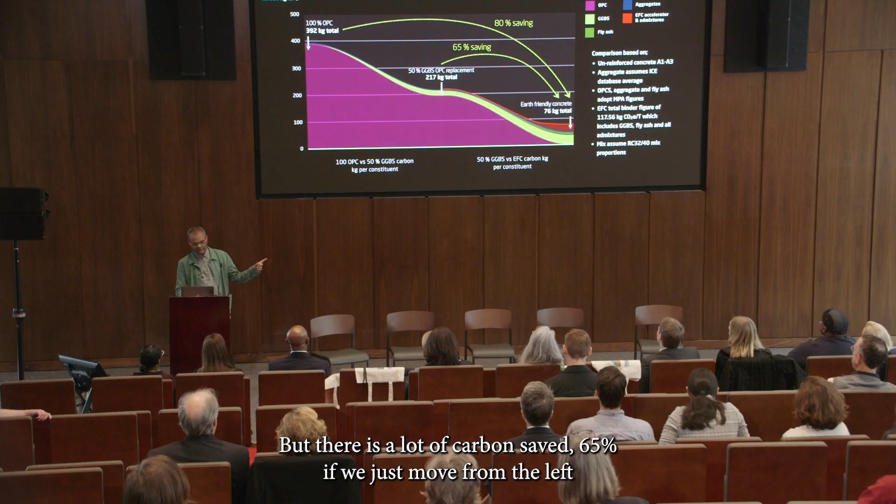I'm not going to go through too much data because it'll probably get a little scary, but there is a lot of carbon saved, 65%, if we just move from the left to the right in concrete. So we could begin to amend or heal the problem concrete has created.

When it comes to steel, how steel is made is the key. At the moment, the reason it's not a good material is because we use coal to make steel. You will probably know, and if you don't, you should, that Sweden has just started making the first green steel.

So if you use electric arc or direct reduction iron, there are ways of taking that steel, which is quite abundant, by the way, still in the core of the earth, and making it carbon neutral, at least, if not heading towards carbon savings.

In terms of demonizing these materials, I cannot accept that I'll suddenly have to stop my career, because stopping building means stopping engineering. I thought I'd show you a couple of examples of how you do things a little bit better. I can't imagine a future without towers, but that's one of the things London is stopping at the moment, and many of us are fighting it.

When you go to other parts of the world, that's all people are building, because we're moving to cities. I don't know how it's going in the US, but I can tell you in China, even Africa, and much of East Asia, towers are very, very important, and they're not going away.

So I picked a type to talk about, how to do it better, and what tools we're using to do it.

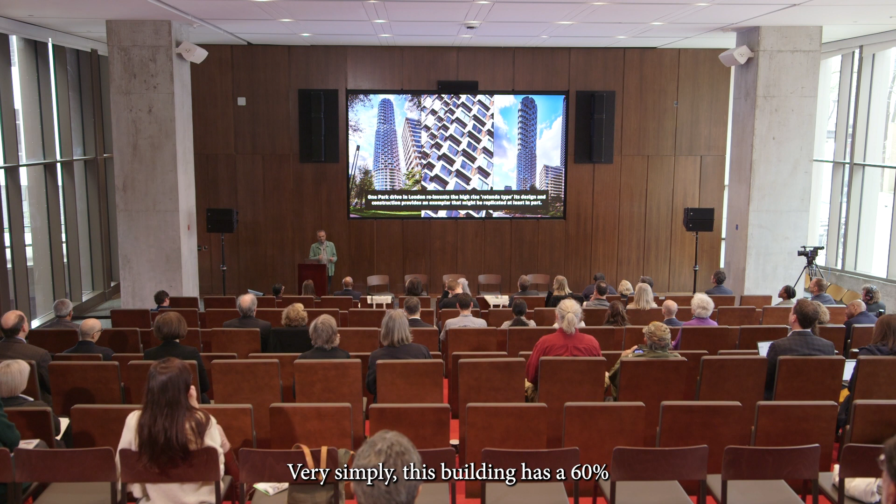So why am I talking about it like that? Very simply, this building has 60% more facade than any tall building you will normally see. Usually, that's the point at which tall buildings get killed, because of the facade-to-floor ratio.

When you do something as clever as this, like the architect has, most of the values we measure—the metrics we've used in the last 100 years—are beginning to shift. So clients are paying for something like this, highly expensive, but it will make the money back. More than anything, it reinvents a high-rise rotunda type.

Its design and construction provide, in my opinion, an exemplar that might be replicated in the global south. I know, as I speak, that there will be at least 50 of these copied in the near future. So it's a slightly better way of doing things.

You don't have to like towers, but it's very pertinent for me to go straight across to another one, which is the exact opposite of this, in Iraq—because that's where the difference between the two front lines is for me. Why would you put a tower in this region where everything is low-level across the Tigris?

The reason is very simple: in some parts of the world, non-modernization is actually threatening ecology. So here, the idea was really for Zaha Hadid to be invited back to a country to try to heal and repair a society, which is going to take more than 100 years after the damage we've done to this part of the world. Why wouldn't they want a tower, and why wouldn't they want to make it interesting?

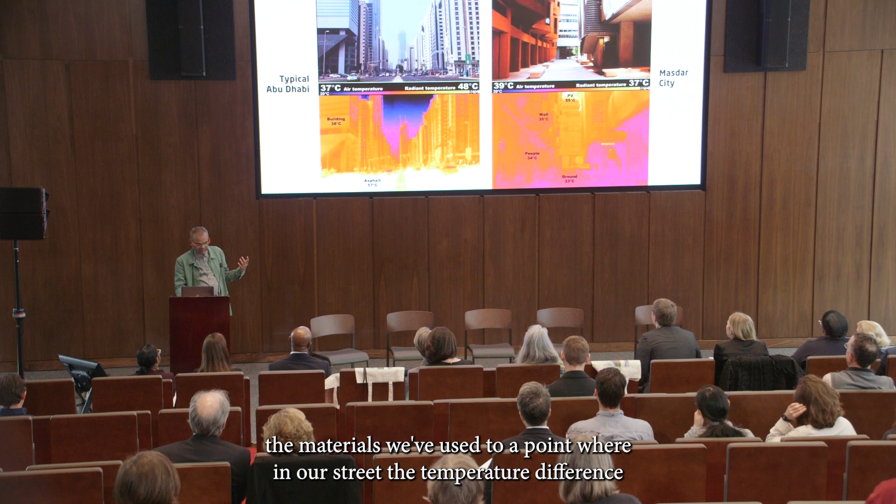But everything we learned from the old, using new tools, made us capable of designing this with passive systems, including the materials we've used, to a point where in our street, the temperature difference is about 4 to 5 degrees C compared to a site next door.

So just rethinking the urban form and making this passive ventilation, as well as making better streets, we brought the temperature down in the street by 4 degrees. When you think we're trying to work towards a 1.5 increase at the moment, that's a result as far as I'm concerned. So when you want to modernize, you can go back to some ideas and not be afraid.

And what this does, I think, is it helps us as engineers also have an ambition to change our own discipline. So most of the work you're now seeing, we are doing with our own tools in-house.

Very quickly - when young engineers are starting, they have to make some very quick decisions on how to do something that's low carbon. And the only way you can do it is not through code. You have to go back to the basics and try to understand how you can measure the potential embodied carbon and therefore the life cycle assessment.

So tools have an enormous capacity, provided they're driven not by a non-collaborator, but by a smart person, who can then collaborate in a slightly different way.

So the future of concrete - the recent material, if you haven't heard about it, is called Seratech, which was invented at Imperial College, and it replaces the limestone cement. We are just about to scale it up.

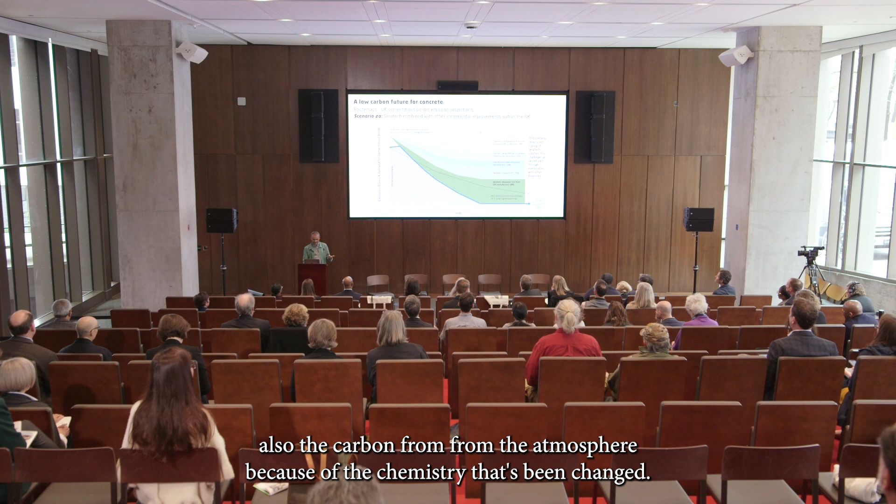Why do I mention concrete? Because I keep going back to what we're using throughout the world, but also some of the Pritzker Prize winning type of buildings. And when I look at them, most of them - this won a Stirling Prize for Grafton - I think that concrete is never going to go away. And this way of thinking should not be abandoned, the basic idea of how you make a building.

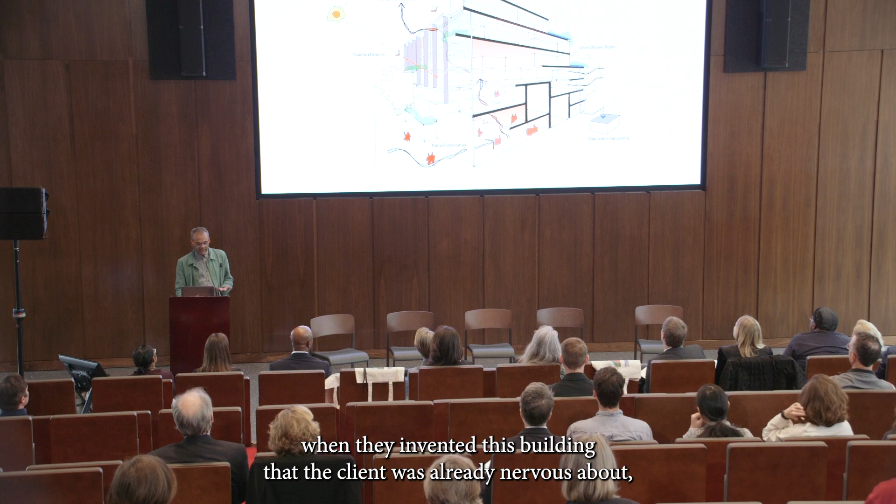When they invented this building, the client was already nervous about using concrete. It's at Kingston University. But what we were able to show them was combining these three boxes. It's a house for the city and the university. It's a fantastic building by Grafton.

We could peel it all the way back to the most basic, simple, optimized systems in structure, so we could use as little concrete as possible, but also the most efficient concrete, and increase the lifespan of the building from normally 60 years to beyond that.

So sometimes simplicity is the power of actually understanding this. And you're not going to give that to somebody who can't do complex buildings. Somebody who does complex buildings can do the simple ones better than somebody who does simple buildings all day long. It's just the way it is, as I see it.

So what has that done when we published that? The other missing point - I said to somebody earlier, I don't see any developers or constructors in here. I think that's a major problem for you and for us, for everyone. So construction people need to be brought on board. That contractor was so pleased with winning the awards.

We are together now with Cambridge University and many others, developing a steel and concrete low carbon cassette system, just going through. So the research is being funded by a construction company who won't patent it. It's just that their ESG also has to respond to the climate problem if their shareholders are going to be happy. I haven't stopped at that.

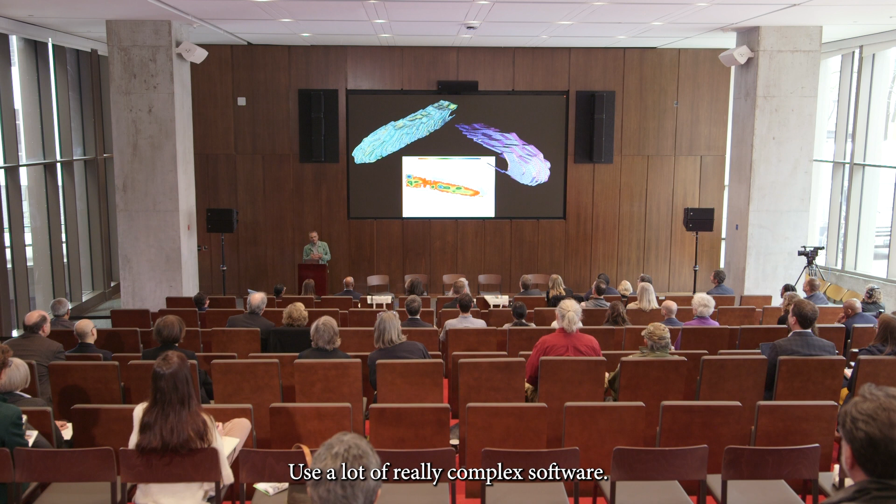And it was a very simple idea, metaphorically. Driftwood was what he found on the site, and how could we recreate that in steel? We took a lot of time to take the shape, not really interrogate it, but take it. How could we just make that shape? Used a lot of really complex software. These are images from Gehry's software, some of you will know.

We spent so much time really trying to rationalize this thing and find simple, cheap ways of doing it, and eventually came out with a fantastic paper project, only to discover that we had a blind spot, because the only way you could make that steel was through that machine on the top left, which is about 180 years old.

So to bend this steel, it's still going there the old-fashioned way. It's not 3D printed, it's not all these things we read about, how we can make almost anything and mass customize. The old-fashioned crafts are still working like that, and they could only bend a 6mm plate. So all the optimization I showed you on the tools and in the computer was largely wasted, because if we'd started from there, we would have designed it very differently. So blind spots are important.

Blind spots can also be dangerous for somebody like us coming to the US to say things and upset people. So when we do competitions, we find ourselves in this situation.

Broad Art Museum in Michigan, which is now old, which Zaha did - we won the competition by not doing a curved building, because the general feeling our side of the Atlantic was that you don't like curves. So we thought we'd keep it straight, and we'd go to Detroit and look at the car industry and take metal from there and fold it. So we also thought we were being very smart materially. This metal could do the structure, the environment, the light, and everything else.

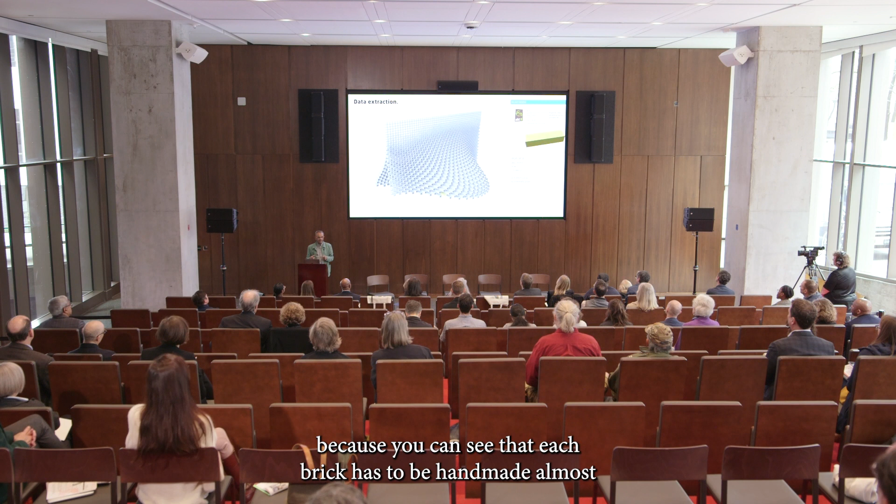You need the construction people with you when you do something like this, because each brick has to be handmade almost, since they're changing in size, thickness, and where they are in the wall.

I wanted to show you that a bit more, because the other strategy is that most of these people don't like you to publicize it. So we did a drone video for ourselves, and on the day it was released, because the client often wants to take all the credit for these things, we took a video without telling them and made sure the world knew who the engineer and architects were. So there are other strategies that happen.

This is a project with Thomas. We entered the competition together in Houston. I wanted to put it in for tooling purposes to show what we've been doing with it. Farshid Moussavi is the architect with DLR. The three of us entered the competition together and beat some really good competitors.

It's the Ismaili Center, a cultural center in Houston, with a prayer space underground, but also civic space up in the air, gardens, and beautiful landscape, 11 acres, with a small building inside it. I wanted to show it to you because I think, in a way, I'm hoping it will bring the East to the US.

It's an Islamic idea in theory, from Aga Khan, an Islamic community idea that isn't just stealing something and applying it as a collage. It's been thought through—the landscape, the water features, and all the other studies and research he's done for the last 20 years or so. And she's from Iran, so there's a bit of Iranian Americanism in her, so you can see the combination of different people from different parts of the world coming into a wonderful city like Houston, which is ready, by the way, unlike Michigan.

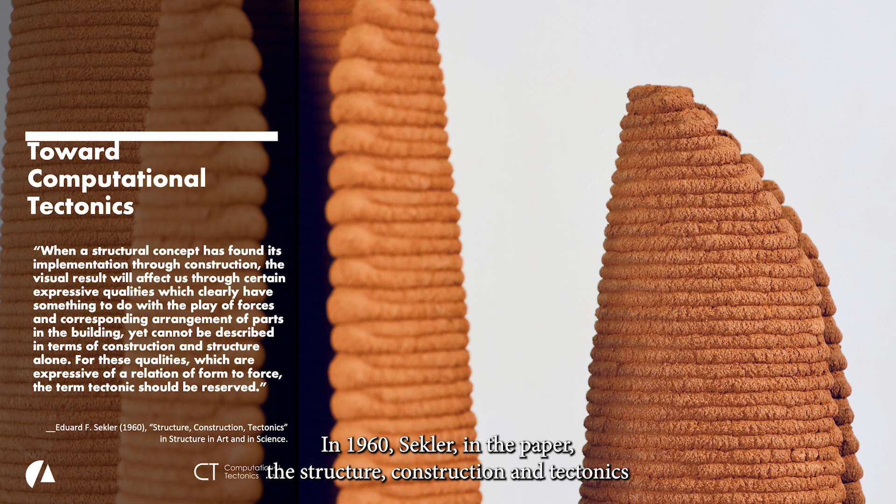In 1960, Sekler, in the paper Structure, Construction, Tectonics, highlighted the expressive qualities of the corresponding relationship between forces and building parts that can only be described through the term tectonics. Tectonics is derived from the Greek term tekton, meaning builder and carpenter.

To build or construct, we need to understand the agencies involved in the design process. One of the main agencies is material systems and their role as active drivers in the design process. The other is fabrication techniques, such as industrial robotic arms, to consider fabrication possibilities and limitations in design processes through a computational design framework. This computational design approach can integrate these agencies in an expressive form to embrace the tectonics of form and structure. Computational tectonics is a computational design approach using advanced algorithms to link materialization processes with form and structural expressions.

I'm happy that Hani covered all the material issues, so I'll make it very simple here. The relationship between material and construction with environment can be considered one of the main factors in changing the climate by emitting carbon. Research shows that the emission of carbon dioxide in the built environment is more than 50%. Carbon emission is 28% for building operations and almost 23% from production of building materials, such as concrete and steel. One approach to address these challenges is applying methods like cradle-to-cradle or a circular economy in building construction.

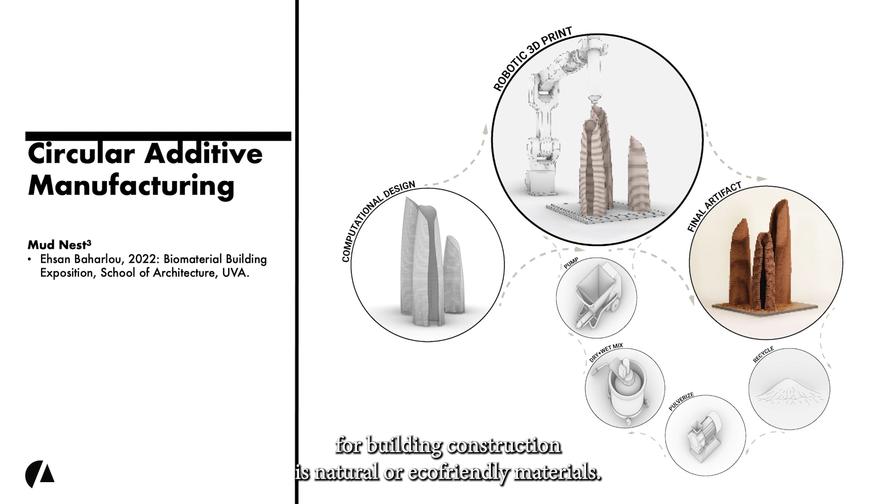A type of material that has enormous potential for building construction is natural or eco-friendly materials. According to the World Business Council for Sustainable Development, the use of bio-based or eco-friendly materials with carbon sequestration properties will reduce the carbon footprint of buildings. One of these natural materials that has been used in construction for thousands of years is soil.

Mud Nest 3 is an attempt to test the process of circularity to explore the tectonic potential of earthen materials in 3D printing non-standard forms that address challenges such as buckling behaviors. With a sustainable approach, we use Virginia red clay. We pulverize it and grind it. After a series of mechanical sedimentation tests, we prepare the dry mix, then make a wet mix, and after that we start using robotic fabrication to 3D print this small artifact.

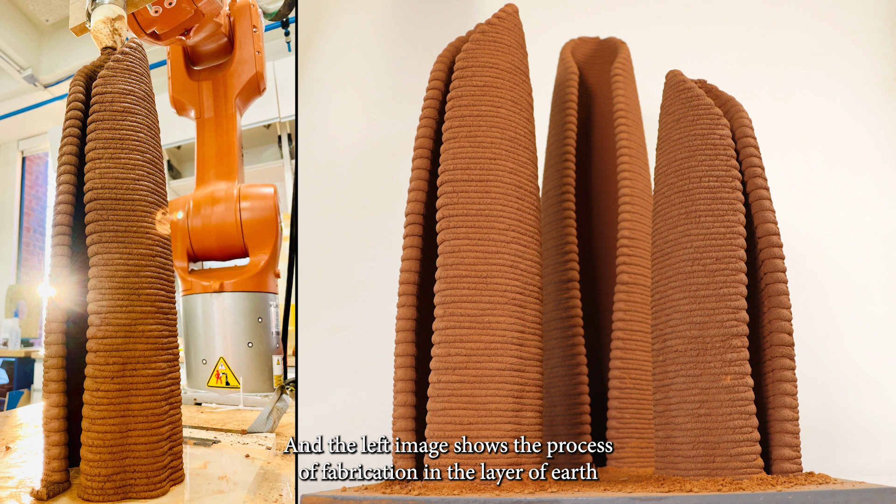We developed a computational framework to simulate the buckling behavior while generating a toolpath for 3D printing. The computational framework is a parametric tool that monitors the user's input to keep it inside the parametric space. In this image, the left picture shows the process of fabrication, where layers of earth material are deposited in a specified location, and the right picture shows all the artifacts standing next to each other.

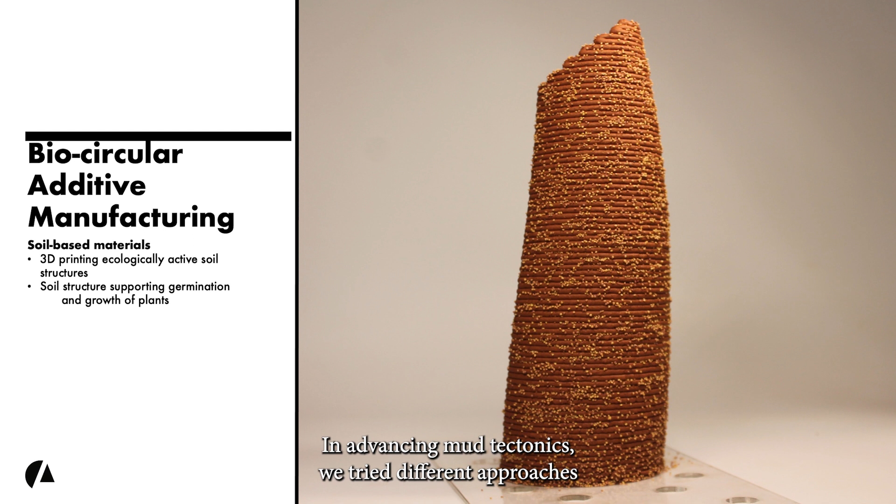As I mentioned, in advancing mud tectonics, we tried different approaches to keep the earth structures ecologically active. We developed a mixture of mud without any chemicals or additives. This mixture is viscous enough to be 3D printed and has enough nutrition to support seed germination.

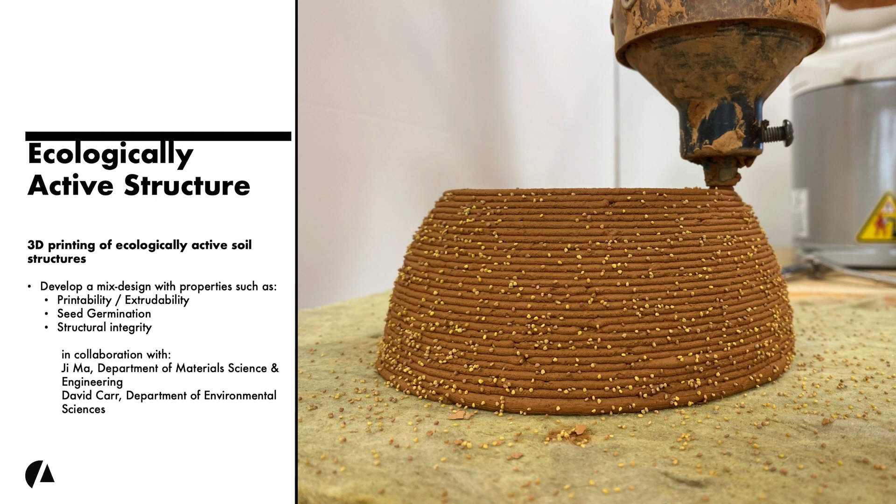Prior to the mud project, in collaboration with Professor Ji Ma, Department of Materials Science and Engineering, and Professor David Carr, Department of Environmental Sciences, we developed this ecologically active structure. In this project, we started to study the feasibility of seed germination while measuring the water content of the soil, and we tried to move toward more architectural elements, such as dome-like objects.

Here you can see the process of 3D printing with a robot and with a simple extruder bot that extrudes mud on location while we are sprinkling seeds on it. We kept seeds to grow fully and start seedling to cover the dome structure without damaging it.

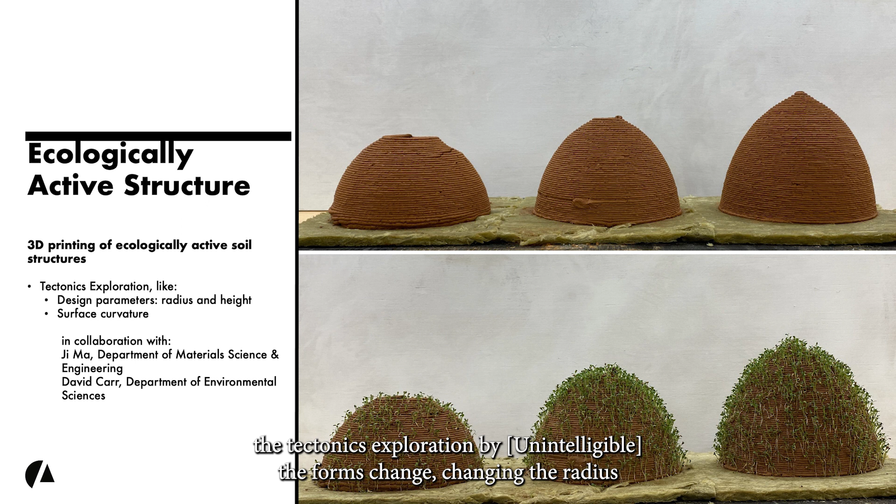We continued the tectonic exploration by parameterizing the forms, changing the radius and the height of the prototypes. It shows at which level the overhanging can work and when the deformation will occur according to the form.

For example, in the images on top, you can see that it cannot cover the whole dome, and it just started buckling in the left image. We continue the tectonic exploration.

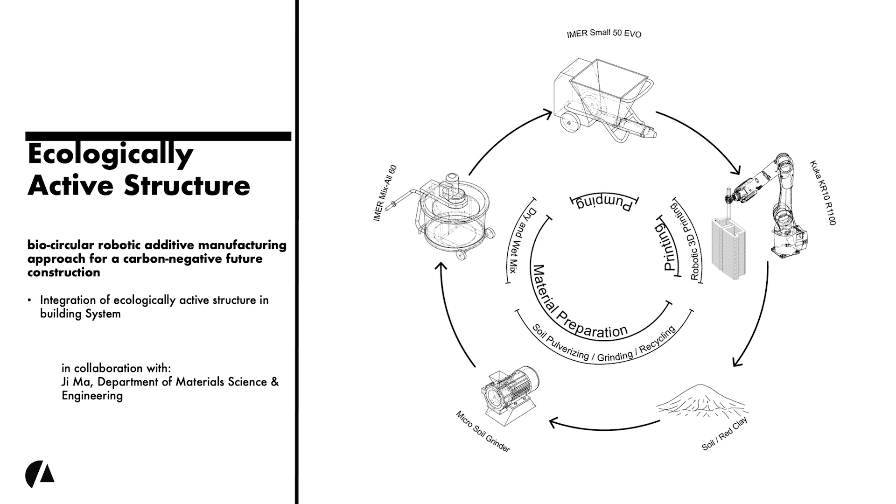An ecologically active structure, we call it, is a structure that maintains certain conditions for flora and fauna. We started to develop a mixture of mud without any additives to be printable and provide us with the possibility to scale up the process.

We adjusted the fabrication process from the small extruder to use a progressive pump. The process of fabrication was aligned with circular construction. We reduce, recycle, and reuse the soil until we achieve the desired tectonic system. This can be called a regenerative design process to rethink mud architecture and revolutionize it.

Here you can see we targeted a building element, part of a partition wall fitted between the stud structures. One side of it was designed to germinate, and another side was left to be considered for finishing layers. The space between these two surfaces is suitable for adding eco-friendly insulation, such as hempcrete. You can see here the back is not germinated but holds the structure, and in front it is completely germinated.

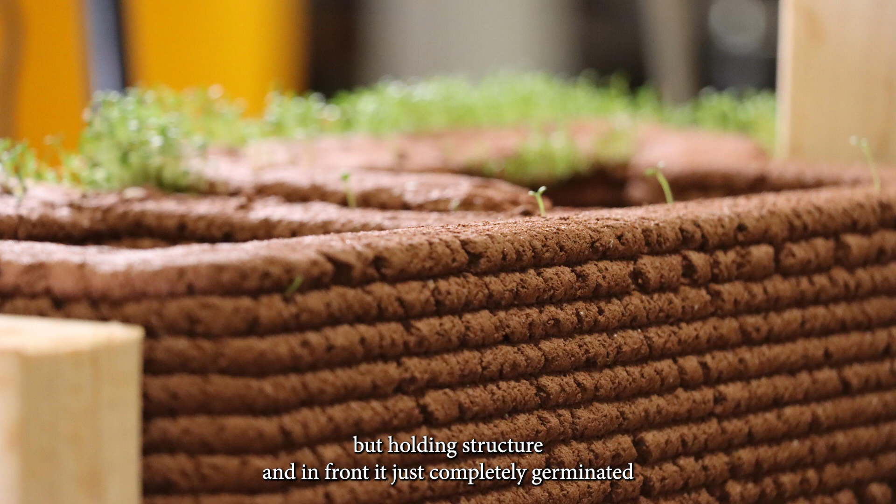Here you can see the final installation between the stud structure. It shows the time lapse of growing seeds until it completely covers the outer surfaces.

In conclusion, advancing mud tectonics manifested in this series of projects uses local resources and seed germination to not only be a suitable approach, but also sequestrate the emitted carbon to the environment. With an ecologically active strategy, we can move toward a carbon-negative future construction.

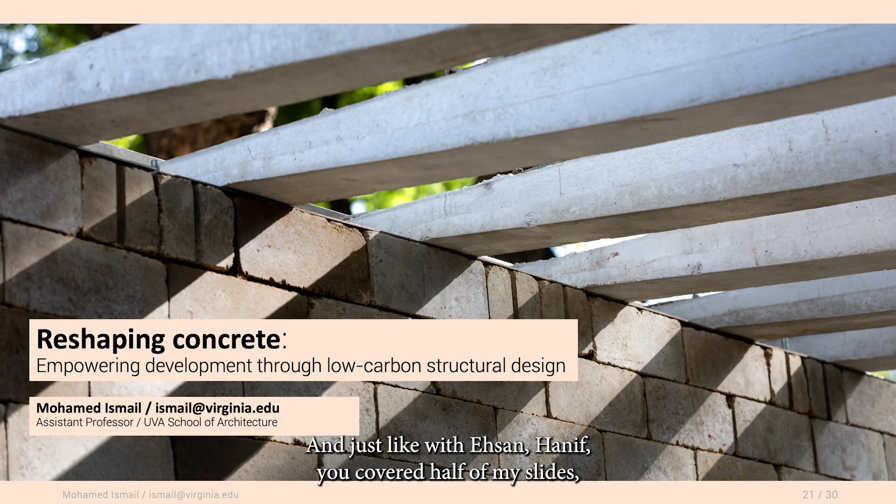And just like with Ehsan, Hanif, you covered half of my slides, so I'm going to just speed through a lot of what I have here. But I want to start with this visualization.

You've heard the statistics, we're building the equivalent of a new Paris every week. Urbanization is happening at unprecedented rates. This is a map of urban growth over the next 80 years, and what you'll see very quickly is that most of this urban growth is happening in developing countries, or less economically developed countries, the global south, whichever term you prefer. By 2050, 90% of urban growth is expected to happen just in Asia and Africa alone. What this means is that we need to build quite quickly.

I also want to note that this is both an academic and personal interest of mine. I grew up abroad, my family is from different parts of this, and so this is a reality that a lot of us see if you're from a similar background.

For me, what that's meant is seeing things like this. This is a common sight. This is a photo from Khartoum, Sudan, which is where my family is from. What you might see is a family that has most likely been allowed to squat in an unfinished construction site. It's a concrete frame building, most likely residential. The family building it probably didn't have enough money to actually finish it, and so they allowed this family to squat in exchange for them watching over the building materials.

And so it reflects this really interesting urgency and reality, which is hard to connect with what we see here, which is essentially that the equations for the cost of construction are not the same everywhere. As opposed to, say, a more economically developed country like the US, where labor really drives a lot of our choices, and so we can get away with less efficient structural systems. We don't care so much about how much material we're using. Less economically developed countries can have materials account for more than 80% of their construction costs.

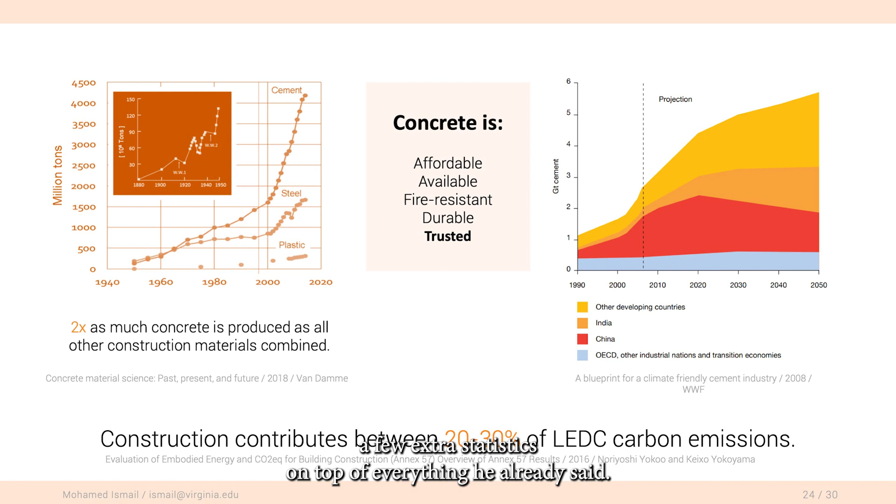Now, Hanif spoke a lot about concrete, so I'm just going to drop a few extra statistics on top of everything he already said. Since the Industrial Revolution, concrete has outpaced the use of every other material. In fact, by today, we're producing 2 times as much concrete as all of our other construction materials combined. It's second to water as our most common material.

Now, why is that the case? Part of the demonization of concrete is that it's just really good at what it does. We don't really have many materials that are as affordable, as available, fire-resistant, durable, but most importantly, in my opinion, is that it's trusted. We've used it for over 100 years, haven't changed it very much, and our building codes are quite hard to change, if anybody is aware of this.

And then when we look at where this concrete is being used, currently China is outpacing the rest of the world, but places like India and Africa, by 2050, are expected to explode in their use of concrete construction. And this is largely because of those urbanization statistics.

And what's interesting is if we look at our carbon emissions globally, we say about 11% is just due to construction. In developing countries, it's 2 or 3 times as much - the carbon emissions associated for that country is associated with construction. So it's even more important for them to start considering these systems.

Residential construction uses about half of our concrete around the world. It's more in LEDCs - basically every statistic I say is exaggerated when you look at a developing country. And most of these systems use what we call flat prismatic concrete construction. Everything is kind of rectangular. It's a system that is developed primarily to reduce the cost of labor.

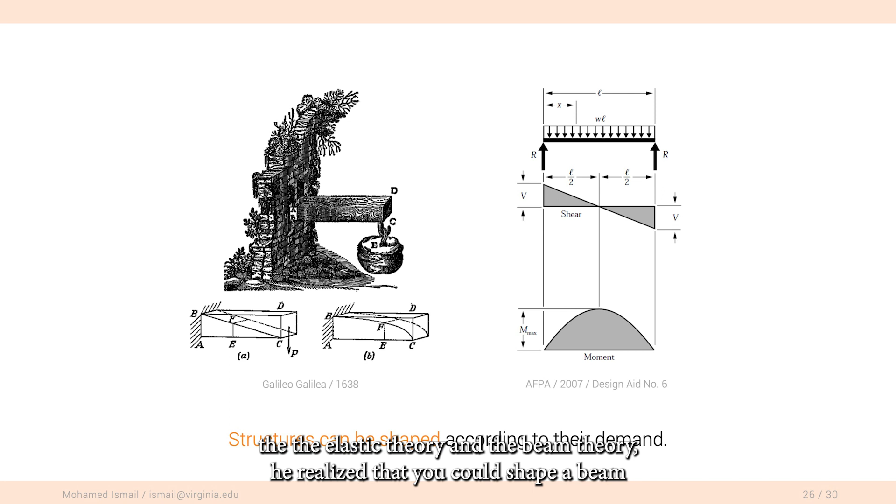We've known this since Galileo Galilei, since the 1600s, when he developed what we call the elastic theory and beam theory. He realized that you could shape a beam according to the amount of force in it. It doesn't have to be prismatic, it doesn't have to be regular. And we know this because of equations and diagrams like this that tend to make architects very uncomfortable.

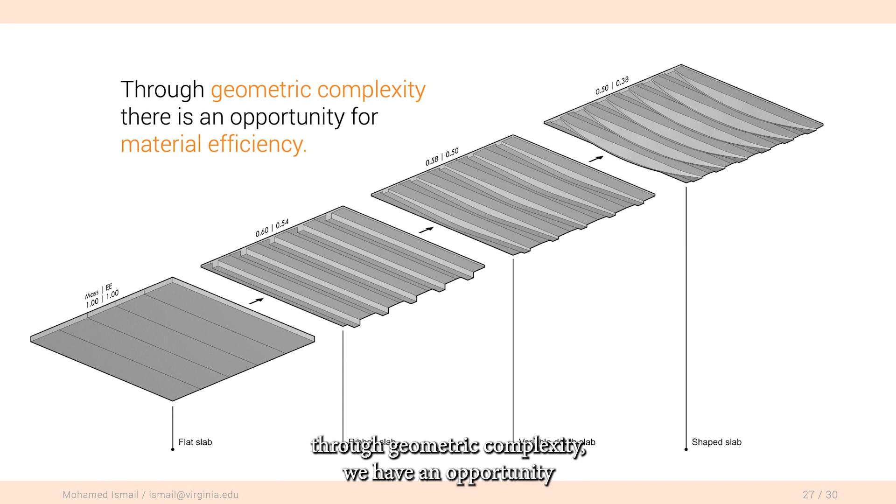But this is a shear and moment diagram for a beam that's simply supported holding a uniform load. We know that the force is not the same everywhere. There's a different amount of material that's needed to accomplish what we call uniform strength. And so that led to a hypothesis in my research, which is that through geometric complexity, we have an opportunity for material efficiency.

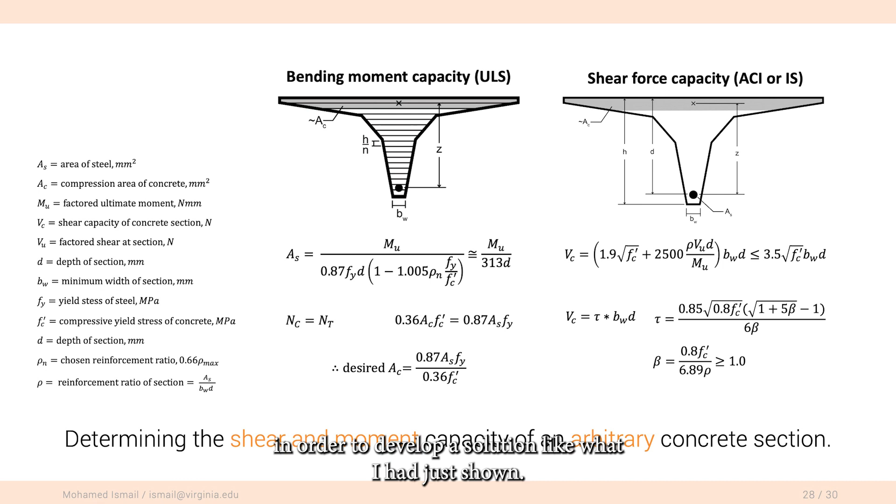This requires a lot of different types of things to come together in order to develop a solution like what I had just shown. But basically, the idea is that we don't necessarily have to build the most efficient system possible, but we might be able to achieve something that is more efficient than what we're currently doing. And we can do that according to the constraints and the opportunities in each context.

And so I developed a shape optimization method that required going through building codes and coming up with ways to very quickly come up with how much steel there is in a concrete element, where that steel is located, how much it deflects, how much steel do we need in order to make sure this is still considered a reinforced concrete structure. All these things have to happen immediately if we want for optimization to occur. These are equations that tend to take 10 to 15 minutes for a well-trained engineer to actually figure out by hand.

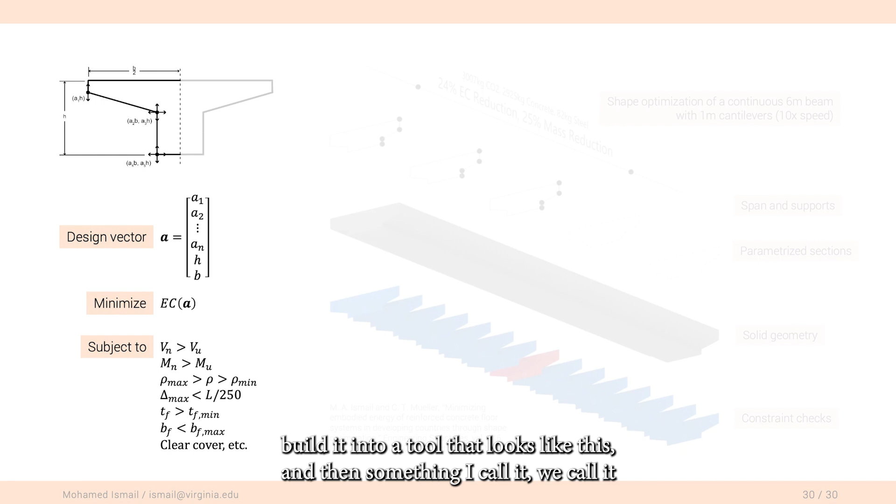What's great is now we can automate this and build it into a tool that looks like this, then run constraint optimization, where we have a design vector controlling geometry. We're trying to minimize some cost, which might be embodied carbon or monetary cost if you have those numbers. These are all numbers that change according to context, but the method is flexible enough to account for those changes, subject to whatever constraints are necessary depending on the building code and practices available in that region.

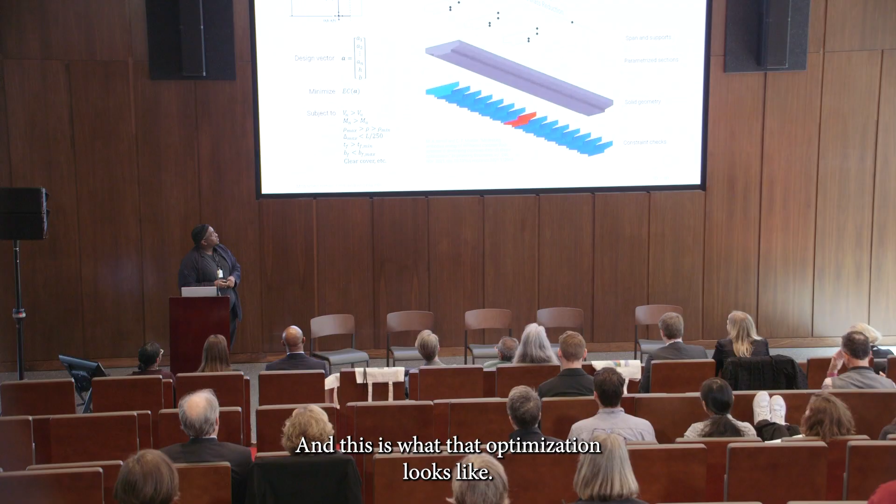This is what that optimization looks like. It's a little more interesting when it's animated, but it's basically running hundreds of those calculations I showed before, automatically, iteratively, until it reaches a solution that is both more efficient and safe and meets all the code requirements necessary.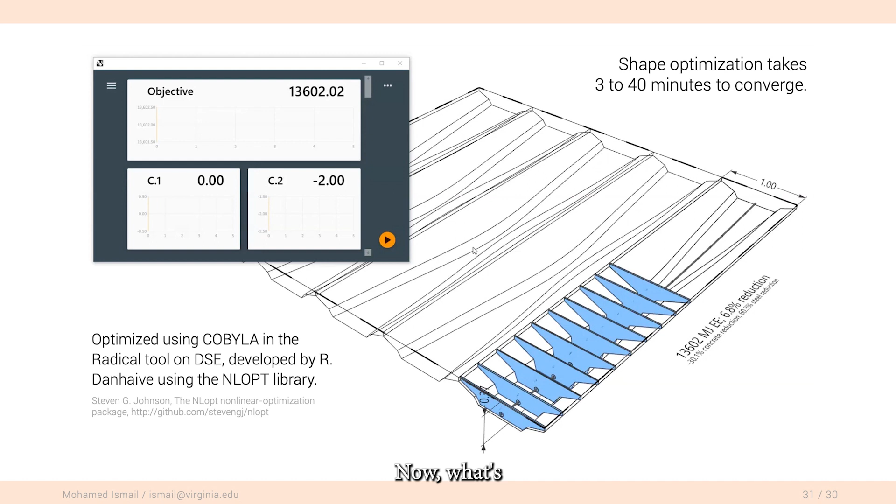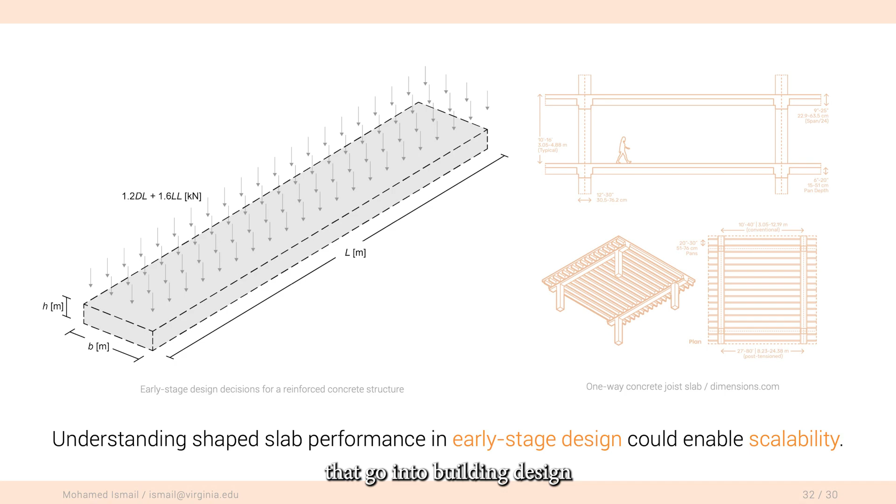Now what's slightly complicated about this, in my interest in making this an accessible method, is that there are a lot of decisions that go into building design before this even comes up, before you're even looking at your concrete floors. You need to account for those through early stage design to allow for scalability. That means decisions like how big are the floor loads, how far apart are the columns — things you might be changing up until the very last date.

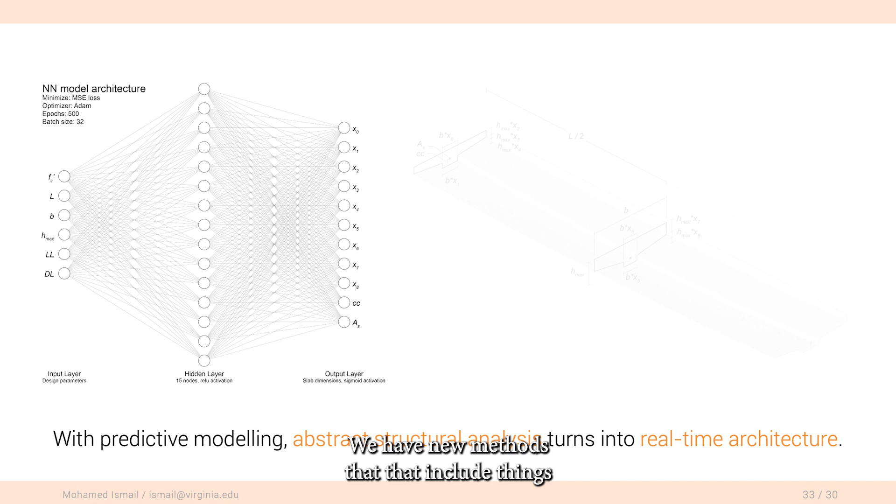It makes it really hard to run a 40-minute optimization every time you have a new design layout or floor plan. But what's exciting is we have new tools and methods, including machine learning and AI, that we can borrow — surrogate modeling, where you take all the past data you've collected and start to iterate and predict solutions in real time.

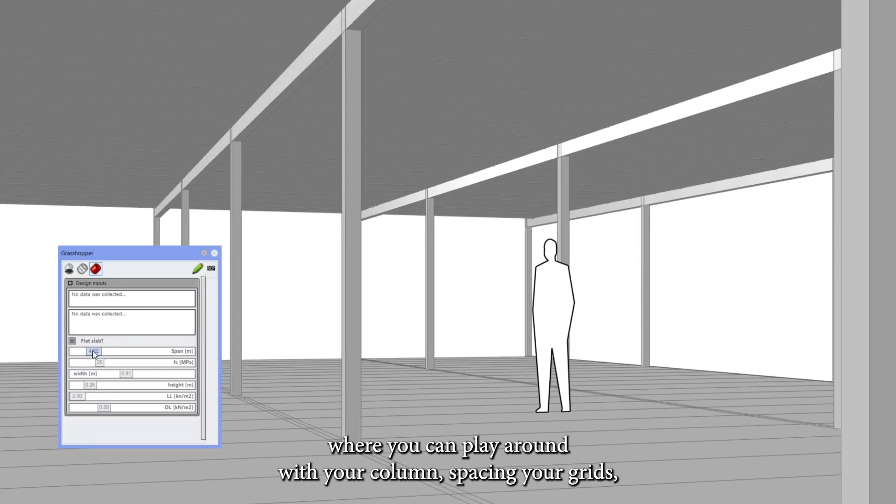This is what this neural network architecture does — it takes design inputs that an architect might still be playing around with, turns it into geometry, and turns that into predictive performance. That means you can get a real-time response where you play around with your column spacing or grids, see how much carbon and mass there is per unit floor area, and compare a flat slab to a shaped slab.

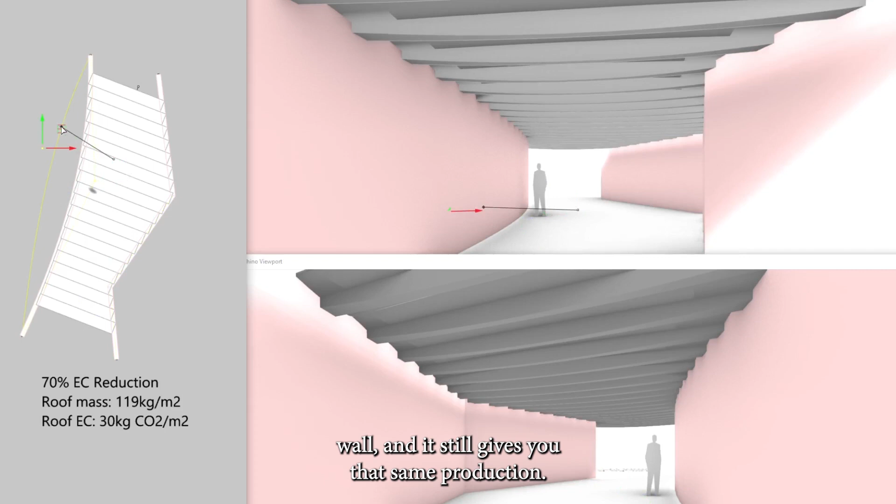And this doesn't just have to be for regular floor systems. This is an existing, slightly unusual pavilion design with a curved plate and a wonky wall. It still gives you that same output — how much embodied carbon you can reduce — while knowing those designs are most likely very close to structurally efficient and safe.

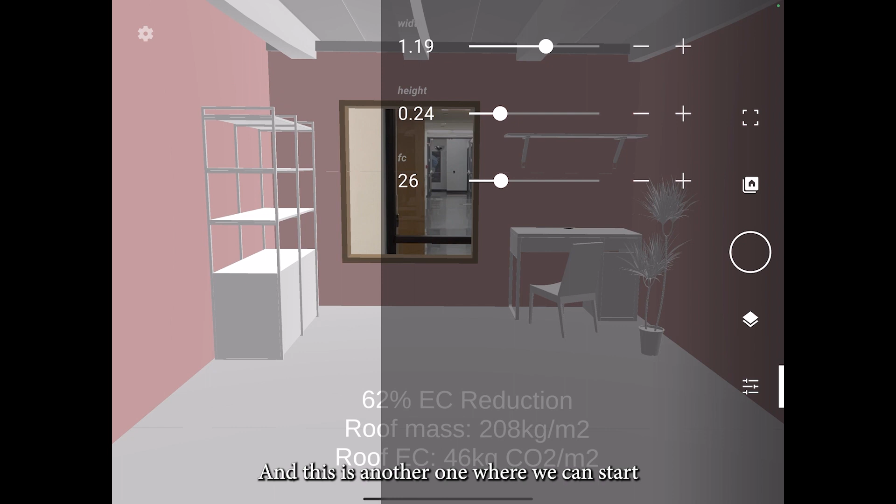And this is another one where we can enable workflows that already exist, like virtual reality tools in Fologram. I just use an iPad, point it at the room, mess around with those same inputs, and it gives a predicted performance according to the design inputs.

It doesn't have to be someone trained in architecture or engineering. This is something you could bring to a potential client, or someone looking at affordable housing options who doesn't really know what it's going to look like when we're considering all these options months ahead of time.

Now, none of this really matters if we're not able to build it, obviously. Everything I've shown has been a nice image or video on screen. Luckily, I've had the opportunity over the last few years to work with a number of really amazing local partners who understand construction, and it was a back and forth between us.

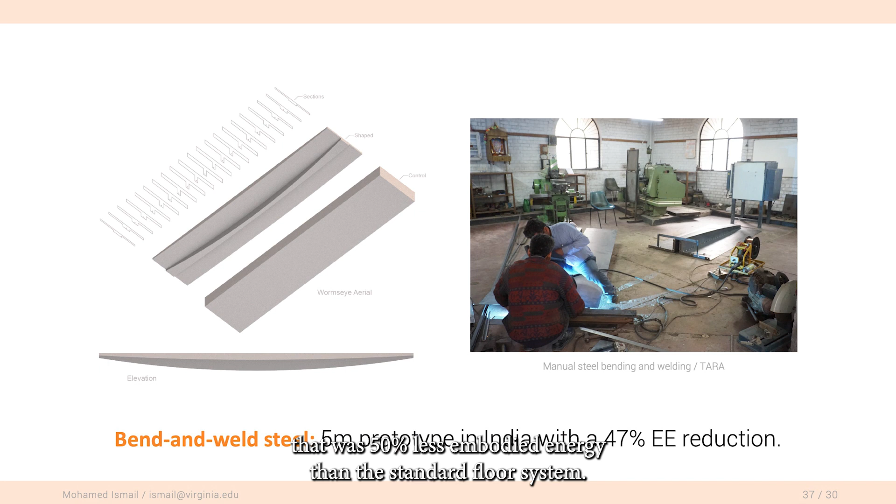For instance, we developed a prototype in India that was 50% less embodied energy than the standard floor system. This was the first full-scale prototype, and there are two main lessons from this: that we could design things that were efficient, and that we could design them according to what was available.

For instance, we went in with the assumption that you could do CNC-milled foam, but found out that foam wasn't available in the quantities we wanted. By simply adjusting the parameters and how they relate to the final geometry, we could redesign a floor system built using steel formwork, laser cut with laser cutters already available in Delhi, and welded by people who already had years of experience welding steel.

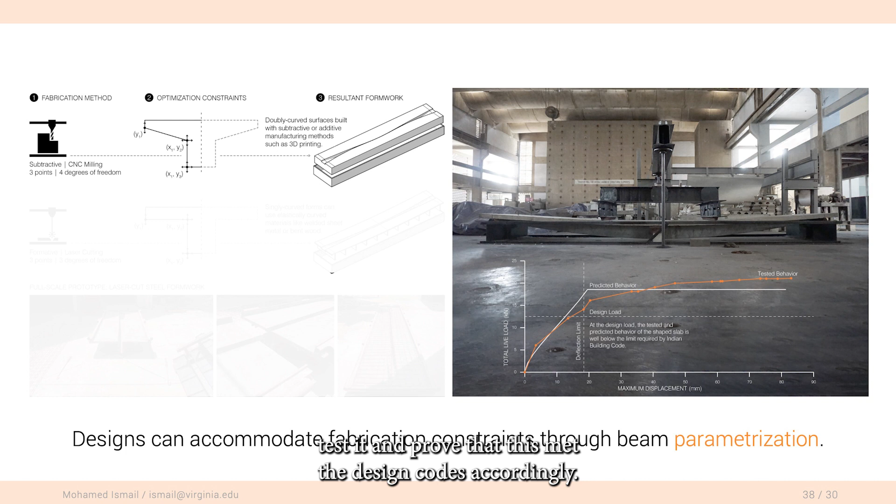I didn't have to do anything in the fabrication. We had these amazing people pull this off in a week, build a form, test it, and prove that this met the design codes accordingly in India. It had the predicted behavior, failed in a ductile manner—these are fun engineering terms, but basically it was safe and met the requirements.

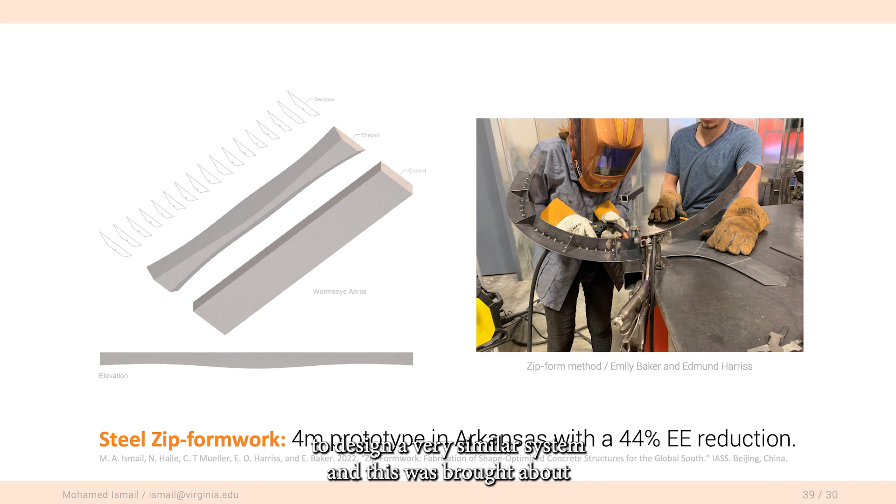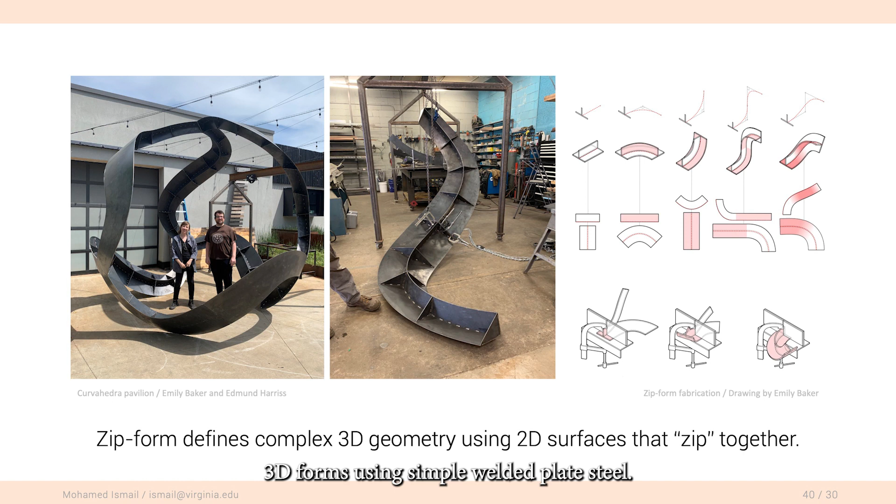We also worked with colleagues in Arkansas to design a very similar system, brought about by research they'd been doing, where they developed this awesome system called ZipForm that allowed them to build complicated 3D forms using simple welded plate steel. It's something that could be cut out flat and then forced together through a jig. This is my colleague Emily Baker doing this with students who had never worked with steel before, and they were able to figure it out themselves.

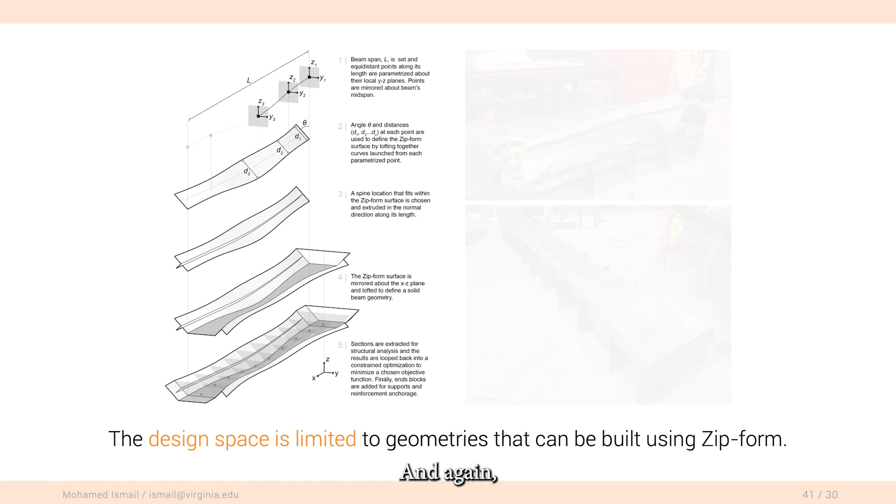We're embodying the complexity of fabrication in the design process itself, so there's no guessing when you get to the actual construction site. It just comes together like a puzzle piece. And again, there was an awesome testing lab in Arkansas where they proved this met the structural codes we designed it for.

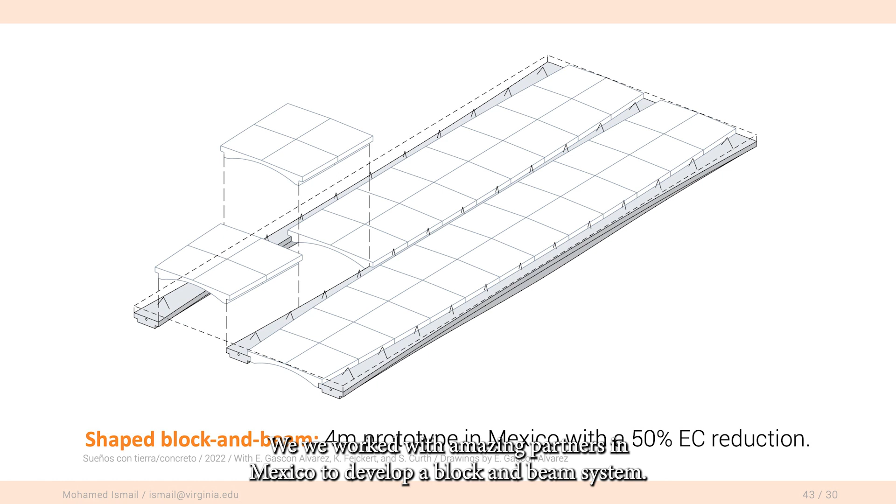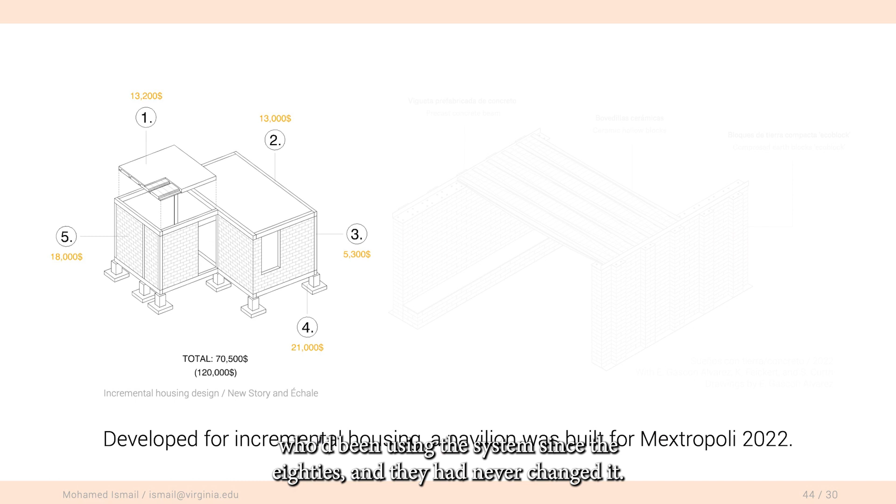This is the last prototype I'm going to talk about, and it was my favorite. We worked with amazing partners in Mexico to develop a block and beam system. This came from a conversation with affordable housing constructors who'd been using the system since the 80s and had never changed it. We asked if we could design something 50% less carbon intensive and less material intensive, and had the opportunity to build a prototype as a pavilion for Mextropoli.

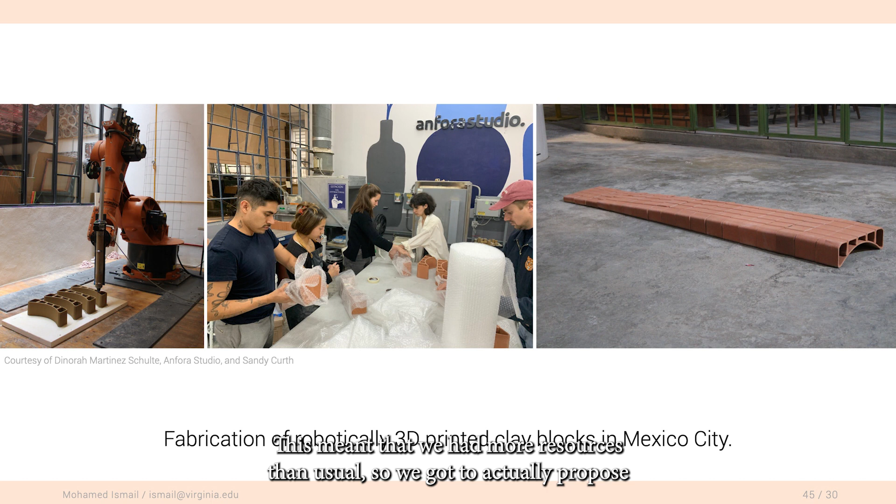This meant we had more resources than usual, so we got to propose something that was maybe a little less realistic, but more efficient.

We worked with an amazing fabricator in Mexico City who started her own 3D printing and robotics fabrication workshop, to 3D print these tiles where every single block is different, but the cost of them is exactly the same. They're all using local clay, can be broken down and recycled, and could be fabricated on site.

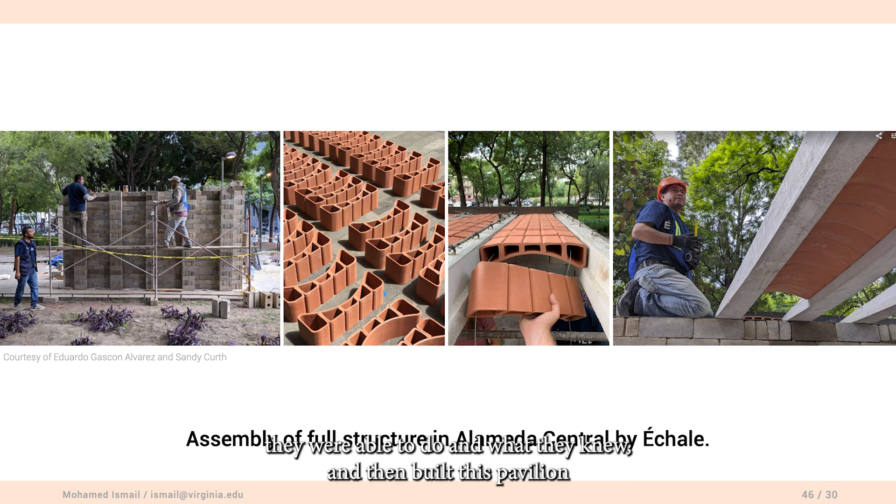We brought together a number of contractors. Again, it was almost automatic once we had designed this according to what they were able to do and what they knew. We then built this pavilion, which was visited by thousands of residents over two weeks—which was amazing.

We never got to actually load test it, which is a shame, but this little girl did some lateral load tests on our behalf. It also survived two earthquakes, which was great and a little scary, but it made it through.

I want to end with a couple of quick thoughts. This is the only slide with a lot of text, but I want to bring back some of the lessons from this morning. There's a clear inverse relationship between the regions responsible for climate change and those suffering most from it—and those suffering most happen to be places that are also urbanizing quickly. So we need to figure out how we can have the most profound and immediate impact.

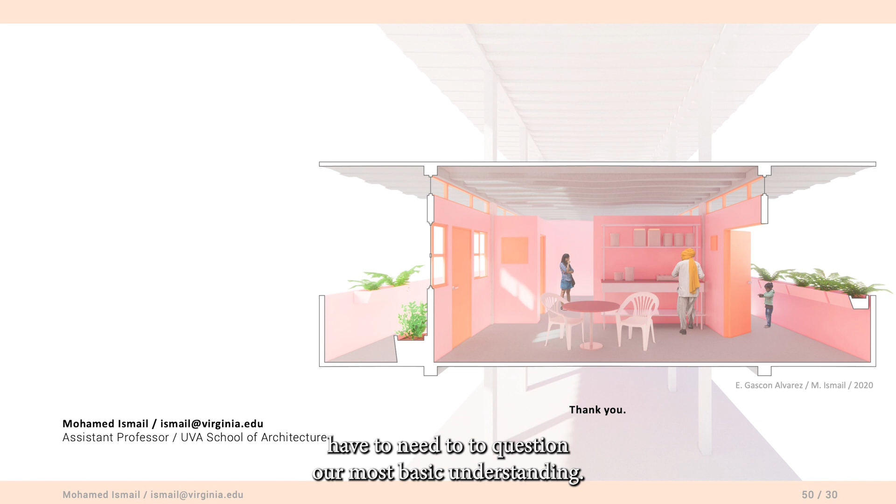Holistic design has to occur across various performance metrics. I talked mostly about structures, but I've worked with people working on thermal, energy storage, and acoustic behavior. There are a lot of different things we need to bring together to make this work. And sustainable building practices need to question our most basic understanding—it's not enough to build the way we've always built.

Today we'll discuss how our material-centric body of work responds to the built environment's contribution to global carbon emissions, which is approximately 20% from materials and construction alone. We do this through two facets, one which we'll touch on briefly, and the other based at the University of Virginia. Together we run the professional practice After Architecture, a studio named to convey the built environment's impact on cultures and ecologies.

This is, most of the time, really a two-person endeavor through which we've completed permanent works ranging from a public memorial in Washington, D.C., to a private cabin in Vermont's scenic terrain. And here at the University of Virginia, as a complement to our professional practice, we co-direct an academic research lab, the Before Building Laboratory, which pioneers new material assemblies to advance circular construction.

Maybe the biggest joy of that is working with a team of paid student research assistants to engage emerging technologies and invent new technologies which enable us to work with new natural materials in new ways, as well as develop carbon sequestering material assemblies.

So we like to start our talks with thinking about how society has considered natural materials in the recent past. We'll talk about two ways to straighten a log. Understanding the embodied intelligence of natural materials is central to our approach.

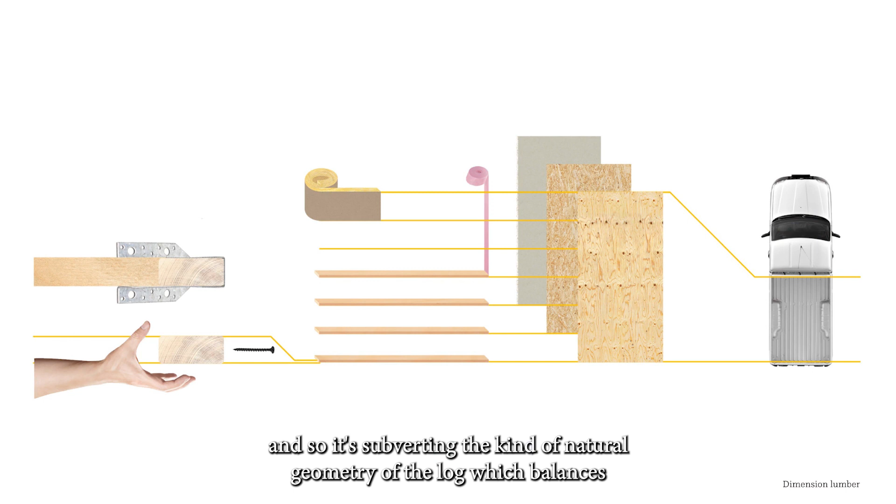Let's begin by considering that since industrialization, the answer to how to straighten a log and transform its raw, arcing form has been to subtract. This subverts the natural geometry of the log, which balances the search for light, water, and structure, and instead transforms it into a prism, breaking it into a uniform element, producing waste and consuming energy.

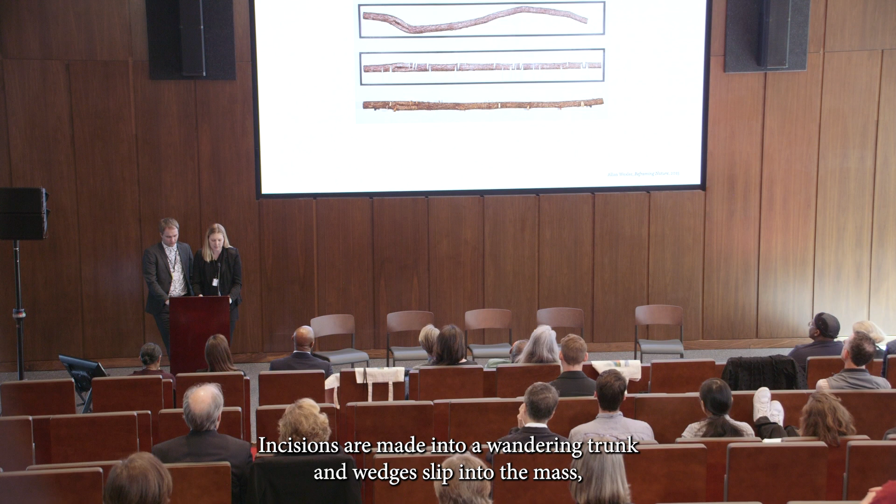So we find favorable an approach embodied by this piece by architect Allan Wexler, entitled Reframing Nature, in which instead of a subtractive approach, he takes an additive approach. Incisions are made into a wandering trunk, and wedges slip into the mass, redirecting the center line into a straight path. The additive operation maintains the trunk's taper, its protective skin, its efficient surface area.

So the next question we'll ask is why is it necessary to even straighten or standardize the log in the first place, which informs our opportunistic approach to leveraging material qualities. Today we will present three tactics to harness material intelligence in construction. The first tactic is entangling.

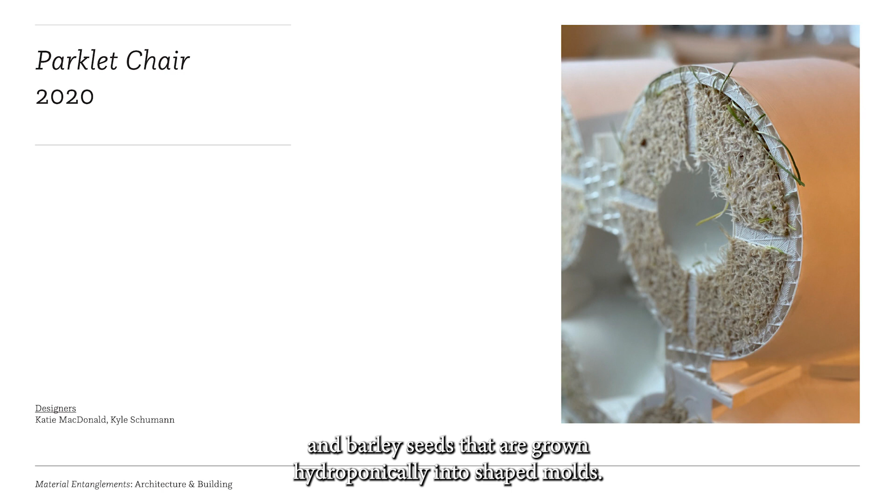We're going to ask, how can we move from a model of purpose-built to purpose-grown? The first project, the parklet chair, is a collaboration between us and barley seeds that are grown hydroponically into shaped molds. Seeds are manipulated to shape the direction of the gravitropic roots and the heliotropic sprouts as these plants are germinated and begin their growth.

The chair self-assembles through the interweaving of these growing roots, taking form as a landscape displaced from soil, water, and sun and resituated into the interior. Everything you see above the wood legs here is made of nothing but the grown barley. There are no glues or adhesives used in the production of this object. It's both real, in that it's grown, but also unnatural, in that it's cultivated indoors and without soil.

This tactic of entangling is then scaled up through the construction of Homegrown, a project which defines an application for the poster child of invasive plant species, also known as the vine that ate the South, kudzu, which I'm sure many of you are familiar with. Homegrown expands the inventory of grown construction materials to species which are not cultivated and harvested, but instead removed from their environment as an act of remediation of the native habitat.

The installation entangles discrete parts into four wall panels, which form an exterior room in this garden context. Read alternately as a ruin or a topiary hedge, Homegrown repositions the aesthetics of digital fabrication, replacing the smooth, crisp, machined tectonics that are synonymous with the digital turn and with mass customization, instead with an architecture that is fuzzy, fluffy, furry, and shaggy.

So the second tactic that we'll describe is bundling. We seek to develop applications for grass building components that marry the precision of industrialized tubes with the structural intelligence and flexibility of branching geometries.

In this project, we are working with colleagues Merrick Pandera, Jose Gomez in engineering, and Deborah Lawrence in environmental science to analyze material capacities and to specify grass species which will optimize carbon sequestration and minimize environmental impact. The resulting system is piloted as a large-scale branching model, as well as a more regular, modular, full-scale structural system.

Our third tactic is twinning. Twinning refers to the creation of digital doppelgangers of physical artifacts through both 2D and 3D imaging technologies. So if we think about traditional project delivery, it typically involves the creation of design documents long before the material is ever acquired or sourced.

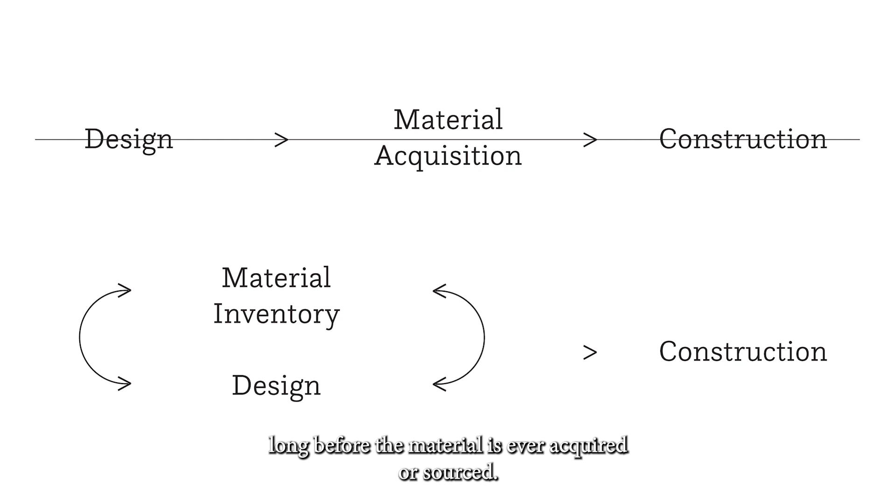Instead, we want to think about how twinning can leverage 3D imaging tools to inventory material inputs and allow the design process to progress as a dialogue between design intent and material agency. An example of this, our project Tangential Timber, pilots an application for nonlinear wood.

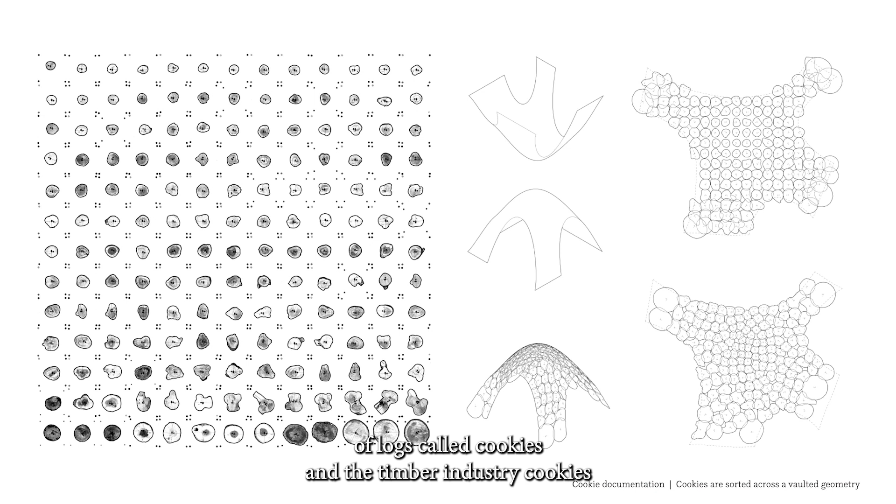48% of timber that's harvested or produced through forestry practices is deemed unfit for construction in its whole state, and is instead shredded down and composited with oftentimes toxic chemicals, or burned for fuel. So instead, we're looking at a different use for that material. Through this, we developed a custom low-cost, low-data workflow that documents these cross-sectional slices of logs, called cookies in the timber industry. Cookies are photographed and traced in 2D and then translated into 3D digital twins.

And we created a test assembly that consists of this compression-only vault structure, with digital scripting tools used to sort these cookies, every single individual piece of material, across the form of this pavilion. The joinery is then tailored to fit the profiles of each cookie, so it's highly specific to the two or more pieces of material that are coming together.

Minimal part reduction is performed with a 5-axis water jet and a 3-axis CNC router. The timber units double as both structure and ornament. The structural stress lines inscribed on the surface of the vault register as almost a second wood grain overlaid with the grain of the cookies themselves. And these lines double as a graphic pattern for aligning the wood masonry units as you're assembling this giant 3D jigsaw puzzle.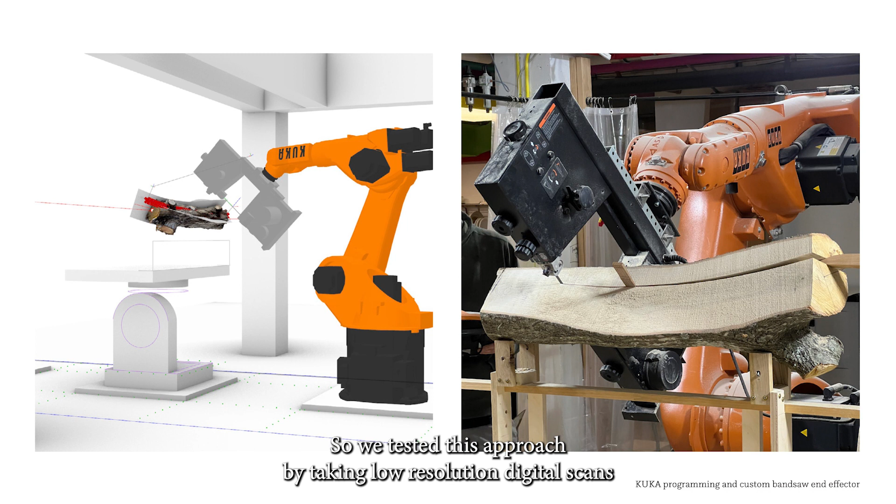Another project, variable sawmilling. We're working with mechanical engineering and environmental science faculty, including Gavin Garner and Manuel Lerdau, and we're currently developing tools that will allow us to mill logs based on their natural curvatures. So we tested this approach by taking low-resolution digital scans of a series of logs and mounting a commercial bandsaw to a robotic arm. Through this process, we're using 3D scans to guide the saw's toolpath, making it possible to precisely mill non-linear and non-standard wood elements and open up applications for this global material stream.

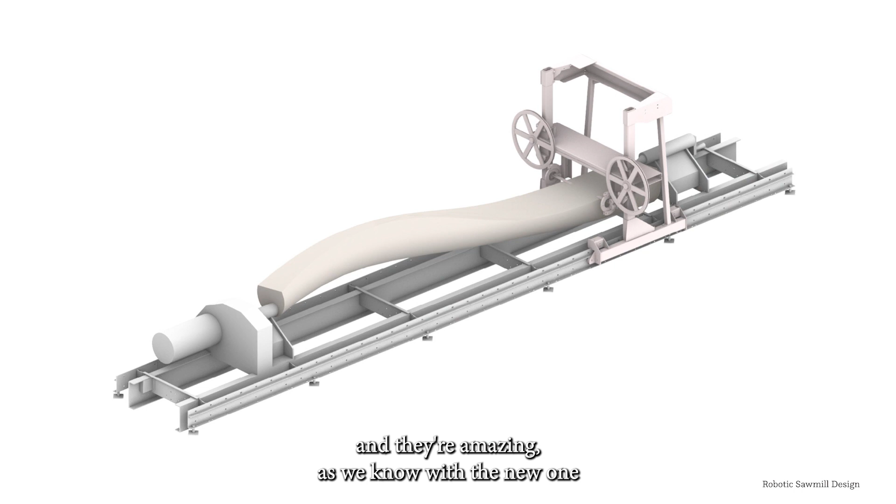At the same time, robotic arm systems are expensive. They're amazing, as we know, with the new one we have at the Allied Space at the School of Architecture. But these arms are difficult to move, and they have some limitations in range and complex electrical and structural infrastructural requirements. So in order to think about this as a democratized technology, we're working on developing a low-cost mobile robotic sawmill that will allow for widespread access to this as a tool for working with nonlinear wood, and hopefully be transferable to other cultural and ecological contexts globally.

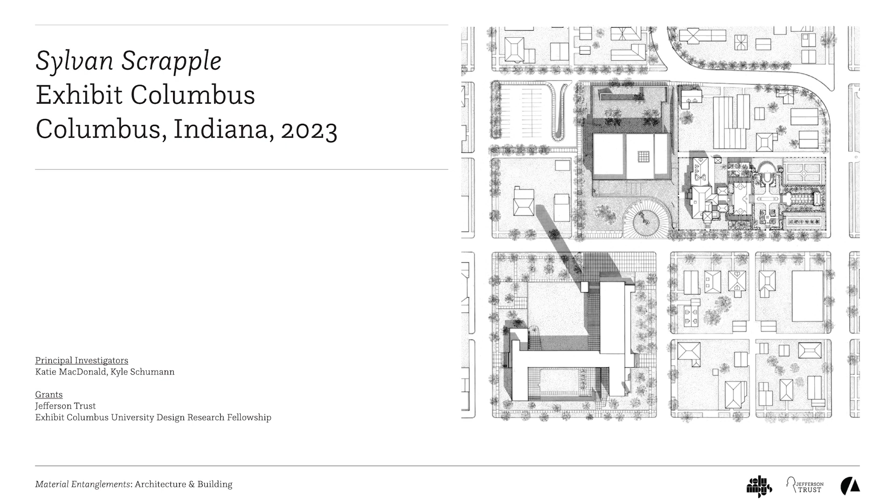This research will soon be exhibited at Exhibit Columbus, a world-renowned architecture forum hosted biannually in Columbus, Indiana. This is a kind of citywide museum. Columbus is home to 81 significant works of architecture, and for this year's exhibit cycle, entitled Public by Design, the focus is on community-based design and the challenges facing activating historic downtowns. Our team was one of 7 university design research fellow teams participating in this year's cycle.

Our project asks, how can construction make use of waste? A primary source for the project, both figuratively and literally, is the former Irwin Block, a Queen Anne masterpiece located just a block away from our project site, which was lost in a fire in December 2022. Working with the building's owners, we're engaging with the material and cultural memory of this important building. Specifically, we salvaged 2,500 bricks from the ruins to be reconstituted into our installation at the Columbus Area Visitor Center.

The reclaimed bricks will be placed in dialogue with a second material system, one we're developing specifically for this project. Over the last 15 years or so, cross-laminated timber, or CLT, which you heard about from Hanif today, has emerged as a desirable kind of building product, particularly in the US, following on the tails of our European and other colleagues. These massive structural panels are composited of stacked and glued layers of dimensional lumber.

Instead, for Exhibit Columbus, we're looking at cutting nonlinear wood on our custom robotic sawmill and compositing it into curved, twisting, and irregular panels that might utilize the natural curvature of the tree specimens and also increase or change the structural performance and the formal, architectural, and spatial potentials of these structures.

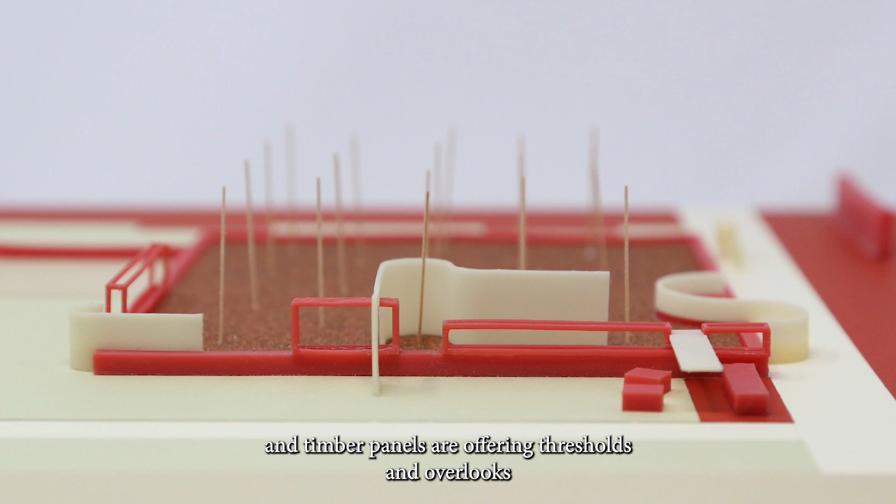So together, the curving timber panels and the brick gabion build upon the planter wall that links the Columbus Visitors Center to the Cleo Rogers Memorial Library by I.M. Pei. The timber panels offer thresholds, overlooks, and furniture, while the gabions form railings and other surfaces, creating a wooded oasis for reading, dining, and play for the community in Columbus, Indiana.

To make an impact, we need to work together, and I think that's fundamental to the attitude of this whole event. So we're really grateful to Dean Hutson for putting this on in the School of Architecture.

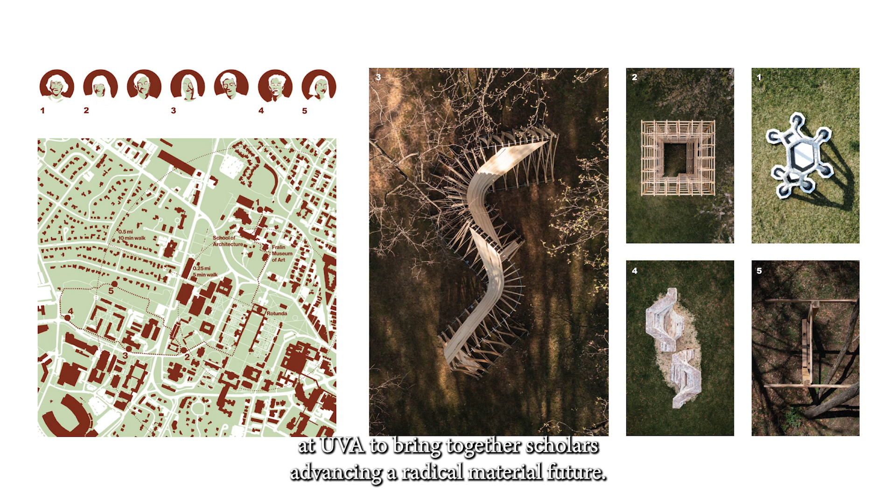We recently curated the Biomaterial Building Exposition at UVA to bring together scholars advancing a radical material future. Architects from 5 universities exhibited full-scale installations here on campus, while a gallery show framed a larger field.

Also key to this dialogue are the voices of the next generation who will champion the climate future in practice. In our core coursework and teaching, students are advancing material research, and they're making an impact. So we hope to imagine and pilot a radical material future, and we hope you'll join us.